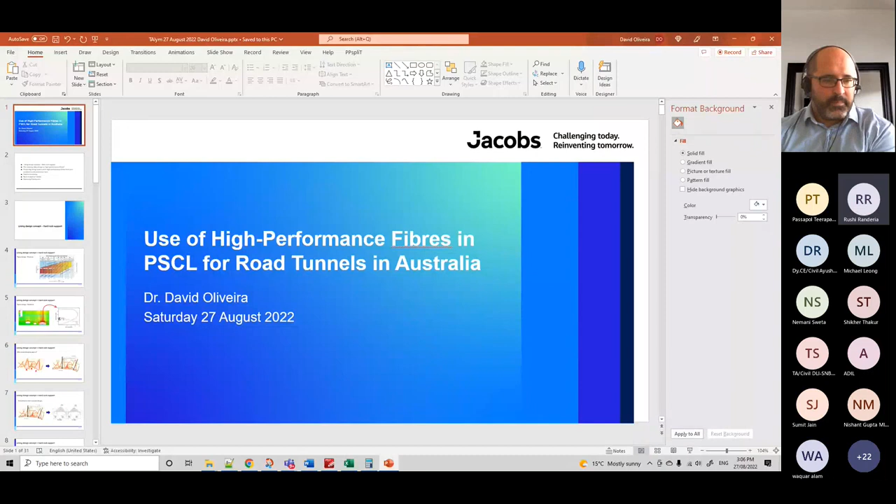And I've said this before, I'll just repeat to those who joined recently: I appreciate you taking your Saturday morning in India to join this presentation. Those who are outside India, I also appreciate your time. I can see a couple of friends here from Australia, so taking their Saturday afternoon as well. Thank you for the invitation, thank you for your time here and for listening to a little bit of what I have to say and my experience. So I'll just start sharing my screen here. I'll just make sure - can everybody see the presentation? Yes? Confirm to me, Rishi?

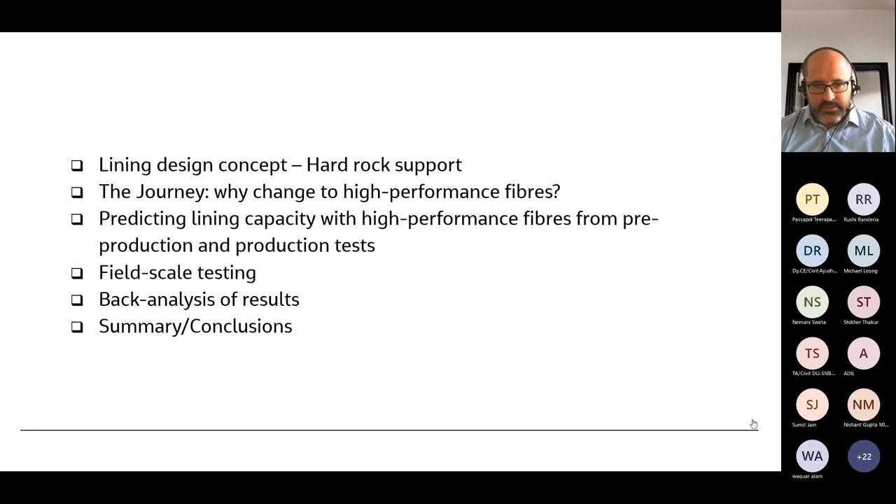So, looking first at the lining design concept, so everybody has a broad idea of what we're talking about here - we'll assume that the majority of people here have some tunneling background or some understanding. So I'll assume some of the most basic comments you already have an idea about. But if you don't, please just hold your question, put your question, and we'll try to answer it at the end.

When you talk about the design of shotcrete lining in rock, it's still today one of the most common practices—maybe more in mining than in civil, but even in civil—to first look at empirical design. It's a great tool, very practical, and a great starting point.

Here's a graph that most engineers involved in tunneling will be familiar with: the Q system support chart. What it tells us is that if you have good mapping and can identify the quality of your rock by the Q index, depending on your span, you can find in this chart the practical support applicable for that tunnel, that span, and that rock quality.

Just as an example, let's assume we have a rock with a Q value of 0.4, and we're looking at a tunnel where, when applying the ESR—similar to a factor of safety—we have a span close to 20 meters, quite large, but fairly common for road tunnels here in Australia. If you look at 0.4 and 20, the bottom chart indicates we'd need a shotcrete lining closer to 150 millimeters, or 15 centimeters, with a rock bolt spacing of 1.5. So that's an initial guidance.

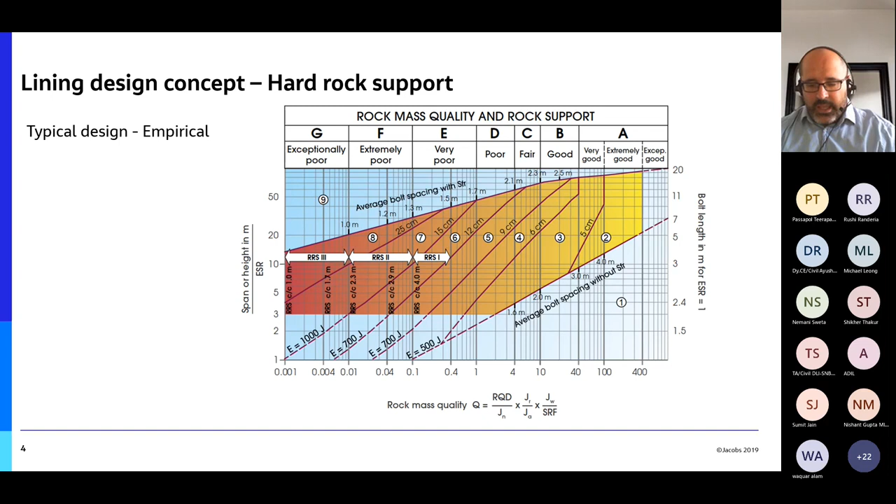So the second most common approach is numerical modeling. With numerical modeling you can bring in code aspects and do a numerical analysis. For example, this is an analysis with three tunnels, and actually beside a cavern here, quite a large cavern.

When you analyze these, you can extract information from your model on how the shotcrete has been loaded—extracting points for all the axial forces and bending moments, and plotting them in a chart where you apply your local standards, reduction factors, and load factors, to see if your loads are within the capacity of your shotcrete or sprayed concrete.

For example, here we see there are minor points exceeding the plain shotcrete curve, but all inside the capacity of a fiber reinforced shotcrete. So in principle this would satisfy code requirements, since you'd be applying the reduction and load factors defined in your code, and you can extrapolate other structural requirements from this.

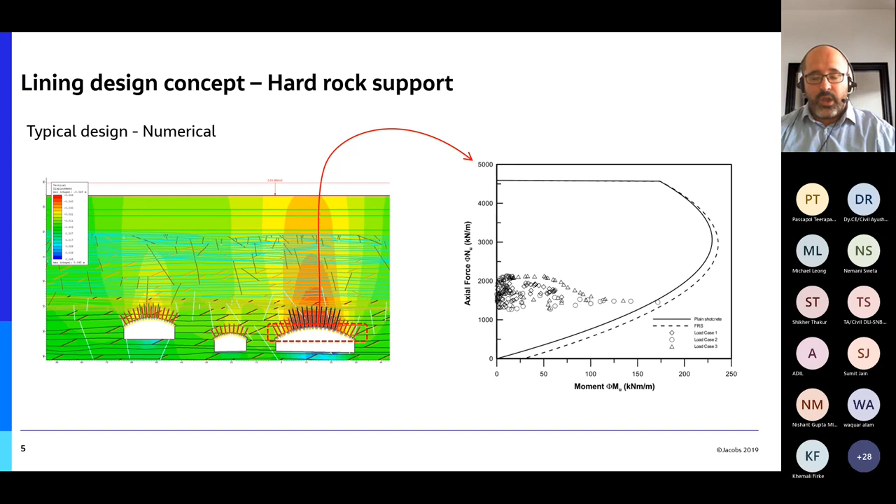I want to develop a simple model that represents how shotcrete performs in a hard rock tunnel, where it works in combination with rock bolts. Let's move on and look at what this means. When thinking about hard rock tunnel support, the first question we have to ask for any support development is: what are we designing against? What are the failure mechanisms we want to look at? There might be many, but here we'll look at the failure mechanism of the shotcrete alone.

When looking at a hard rock tunnel, we're worried about the global stability of the tunnel, and also the stability of individual rock blocks or wedges that develop around the opening. Here's an example: if we open a tunnel, showing a portion of the crown or roof, and if you do nothing, you'd have wedges falling out.

If one wedge falls out, it might bring further failures, because you'll start to unconfine other wedges that were not originally confined. For example, if wedges F and C fall out of your crown, you might start destabilizing wedges A and B, which will fall out, and then consequently E and D, and this could progress to a larger failure. So you want to make this stable.

How we do this in rock tunneling is, for this type of failure, we generally add rock bolts. We would add rock bolts tying wedge F back to better rock, and add a rock bolt through wedge C, which will hold it back.

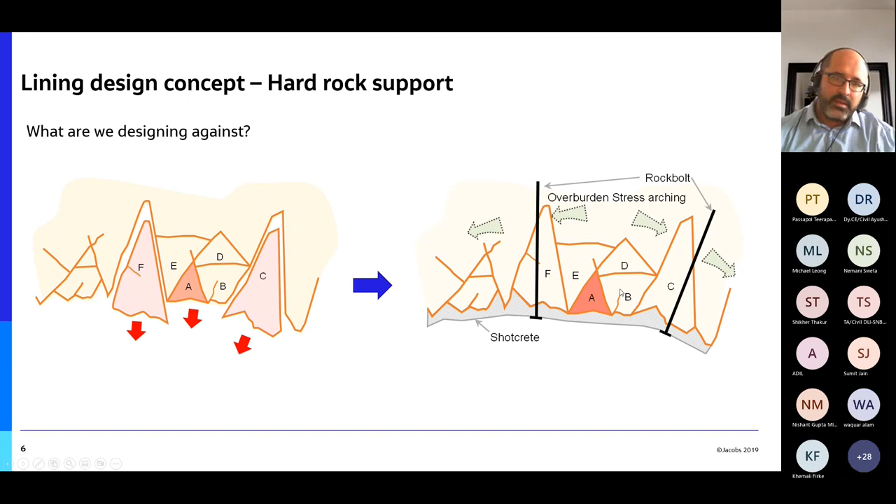So if we move along now, now I know what I have to design for, but how do we design against this? And we start to look at similarities, right? Similarities of how this system is working.

If we think that this system looks very similar to a slab on columns, essentially I have rock bolts that work as concrete columns, like in a building, and a shotcrete layer that works like a slab in a building. So it's just upside down in comparison.

For example, this is a picture from a structural code, just as an example of how we design slab on columns, where you design for the loads between the columns to be taken by the slab and transferred to the columns. The same thing here: the load will be taken by the shotcrete, spanned, and transferred to the rock bolts on the side. So it's a very similar design. We can use this principle of designing similar to a slab on column design, where the rock bolt is our column and the shotcrete is our slab.

When we look at how to design against this, we can use simplified methods. One of the simplest methods, actually present in many structural codes, is what we call the direct design method. The direct design method is very simple.

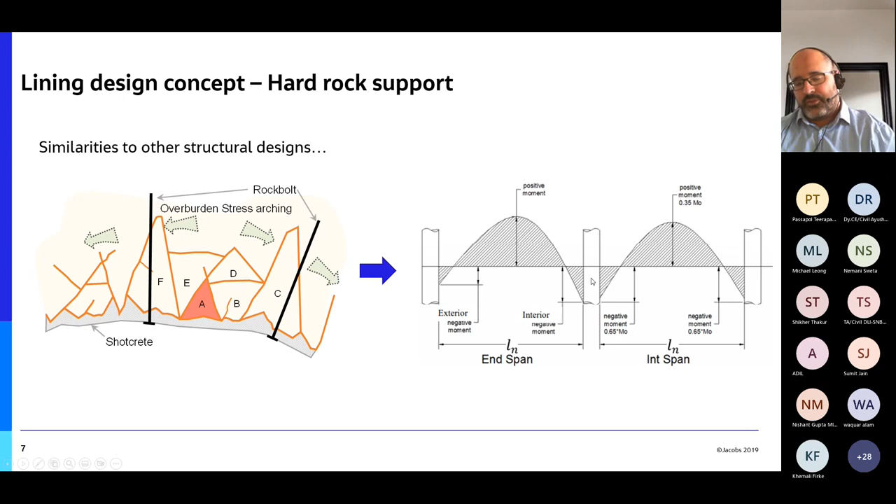This method was very simply addressed and presented in a paper that we use very often here for design, presented by Barret and McCreath. This paper was published in 1995. I forgot to put the reference here, but I'm more than happy if anyone wants to contact me later to know what the reference is — I'm happy to provide it. It's a very simple paper, and it focuses on this simple design method, the direct design method.

Then it highlights, when looking at the direct design method, that for shotcrete in particular there are four failure mechanisms we need to address and satisfy. The first failure mechanism is adhesion. When we spray shotcrete or sprayed concrete, obviously we want it to adhere to the rock, to bond to the rock. We typically want that bond to be strong enough not to fail. So the first failure mechanism is adhesion.

If the shotcrete is well adhered, well bonded to the rock, the next possible failure mechanism is direct shear. So if you have a load, it can actually shear off completely — a complete shear failure, shearing off the lining, just like in this picture. This direct shear is only possible if you have a good bond, if your bond does not fail. If your bond fails, then direct shear is no longer possible, because the shotcrete will be working in a different way. It's no longer bonded, so it cannot shear.

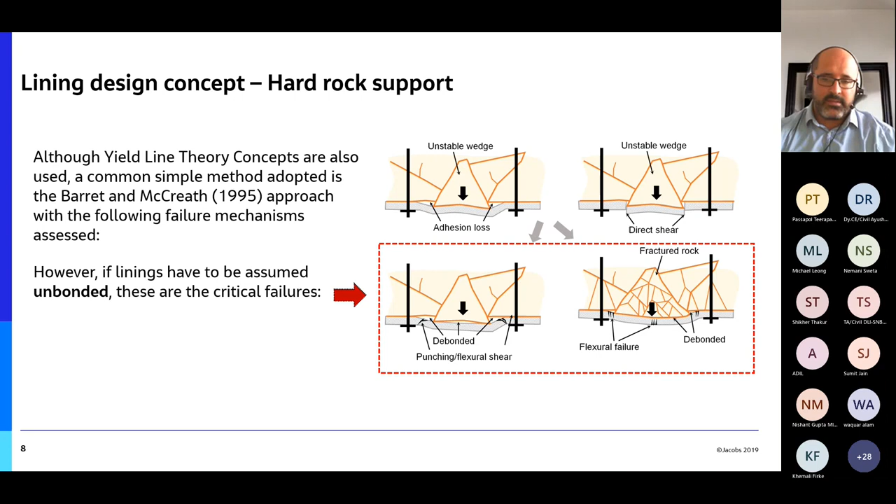So when you're talking about unbonded lining design, which means you assume that over time you're going to lose the adhesion, those are the two failure mechanisms we need to design for. Because we work with flexural capacity and shear, we need to develop shotcrete mixes and concrete mixes that have good flexural resistance, which is what we're going to move to understand now. So how we understand flexural capacity in shotcrete design is what we will have a look at very shortly.

There's only one thing I want to highlight here, just a preamble, a hint to the development and research we did here in Australia on how to better design our shotcrete linings. This simple design method assumes the lining or shotcrete as a slab or beam calculated as simply supported, and then there's just a translation of the bending moments to account for the continuity. So it's essentially relying on a pure bending capacity, just like we do with beams.

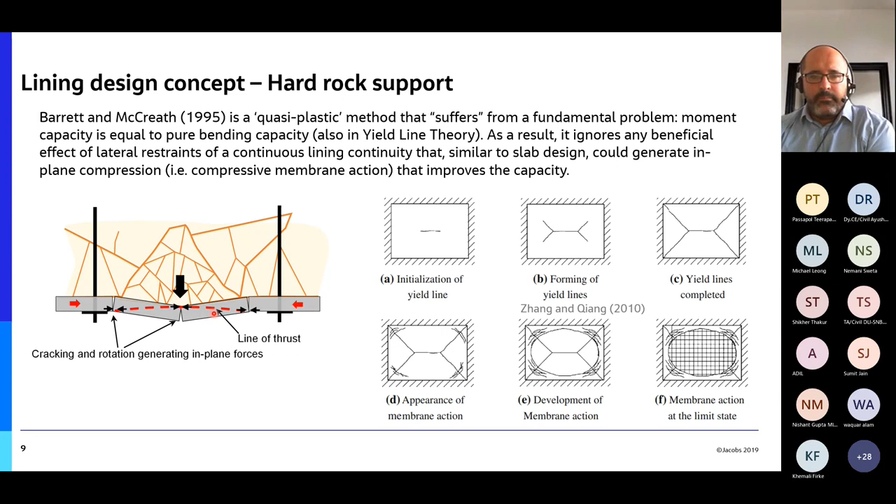As I was mentioning before, if we are relying on the shotcrete here as having structural capacity in bending, we need to satisfy that it can take that deformation. When we think about how the shotcrete is working here with this load coming from wedge A applied to the slab, a lot of engineers defend, and I actually fully agree, that the most representative testing we can do to represent this condition is toughness testing.

So there are different methods. There's the ASTM one, which is a round determinate panel, and there's also a square one, the most common being the EFNARC one. Why is this most representative? Because you can see where the load is applied here simply represents the reaction forces of the bolt.

And everything else is deforming around it and it's pushing. So you imagine that the wedge is somewhere outside here and it's pushing the shotcrete up, and your rock bolt's resisting. So this deformation represents your rock bolt, more or less representing the failure mechanism that happens with the shotcrete around the rock bolt.

Which is very reasonable to make this comparison. There's only one problem with this test, although it represents really well: it's typically done with thicknesses of similar order of magnitude to the linings that we use. For example, this panel is tested with a 75 millimeter panel, and shotcrete for rocks typically will be in that order, 80. The Norwegians established a minimum thickness of 80 millimeters, so you'll be working with 80, 100, maximum 150.

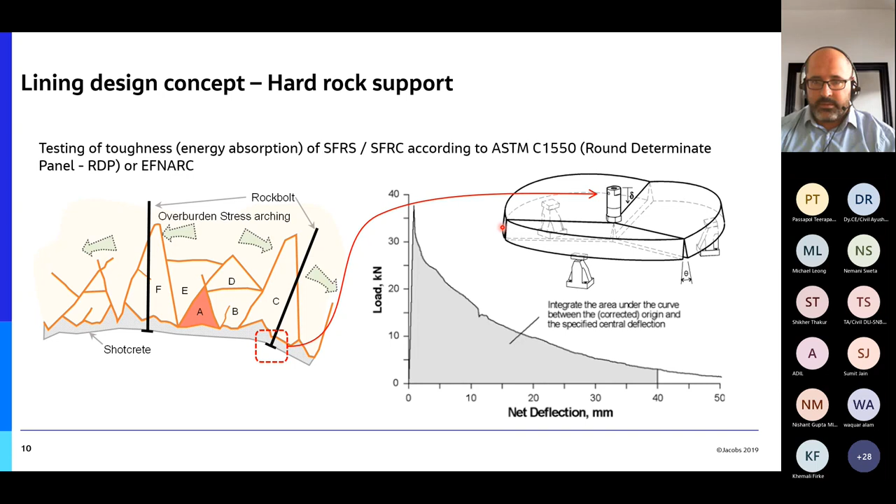There's a few studies, one of them by Stefan Bernard here in Australia, but there's also studies by Ada on how to convert the values from the round determinate panel. The reason why it has to be the round determinate panel in this particular case is because the test is determinate. The EFNARC is indeterminate, so there's no way of analyzing the failure in a determinate way. So it has to be round determinate panels to use this procedure.

There's methods to convert the test results from the round panels to an equivalent flexural resistance, which is the next topic we're going to be discussing. This is based on conservation of energy again, and using yield line theory.

So these are some equations. I'm not going to go into details here, but there are ways of calculating this. Because based on conservation of energy and yield line theory, we establish the way that the panel fails, and we know that round panels always fail this way, with 3 cracks. We can actually calculate an equivalent flexural resistance for a specific crack width that we have to design for.

And this is how we can actually connect the results of a round panel to the results of another testing, which is the next one we're going to show, the beam testing. If we calculate here, he's just demonstrating that calculating the results from this round panel had a very good match with the results of the beam testing, which is a test that directly gives you the flexural strength.

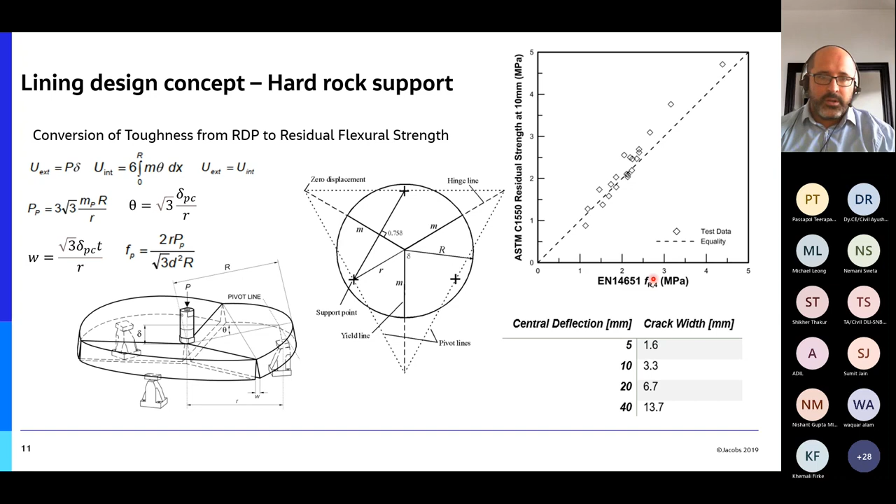As I mentioned, the test that gives you the direct value of flexural resistance is the beam test. It's simple to estimate and define the flexural strength of this beam, because it's also determinate. It's a simple beam, generally following EN 14651, which is a 3-point bending test.

What we get is a curve of load versus crack mouth opening displacement, showing how much the crack opens at this location. This gives straightaway the residual flexural strength, which is described in most, if not all, structural codes, such as RILEM and the fib Model Code 2010. You can apply these values directly, so you'll be in compliance with those codes when using this test.

This test gives you five thresholds. The first one is what we call the limit of proportionality. It says when you load the sample and exceed the elastic capacity of the concrete and it cracks -- essentially the first crack opening.

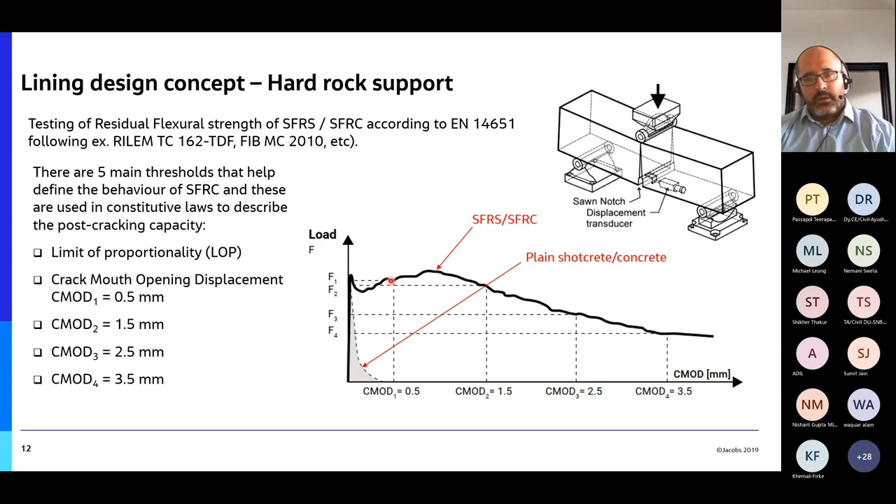Now that we've had a brief introduction to the concepts, let's understand the challenges we face and what we've learned. The first thing is to try to understand what values we want to achieve with our shotcrete.

We can compare, although not directly related, the results of toughness or energy absorption testing with beams. Some guidance, especially for rock support or tunnel support, leans toward toughness, because there's a lot of experience in the mining space where it's typical to specify shotcrete in terms of toughness rather than residual flexural strength.

Generally, in a tunnel where you expect low deformation, you don't need great energy absorption. Typically, mines here in Australia work with 280 joules, a measure of energy, at 40 millimeters deflection using the round determinant panel. In moderate ground, with moderate deformations, you're about 360. When you get higher deformation, typically it's 450 or higher.

This is for areas of high deformation, sort of squeezing ground or higher stresses. In fair to good quality rock in shallow conditions, generally you don't need to go that high -- typically working toward 280 or maybe 360 maximum.

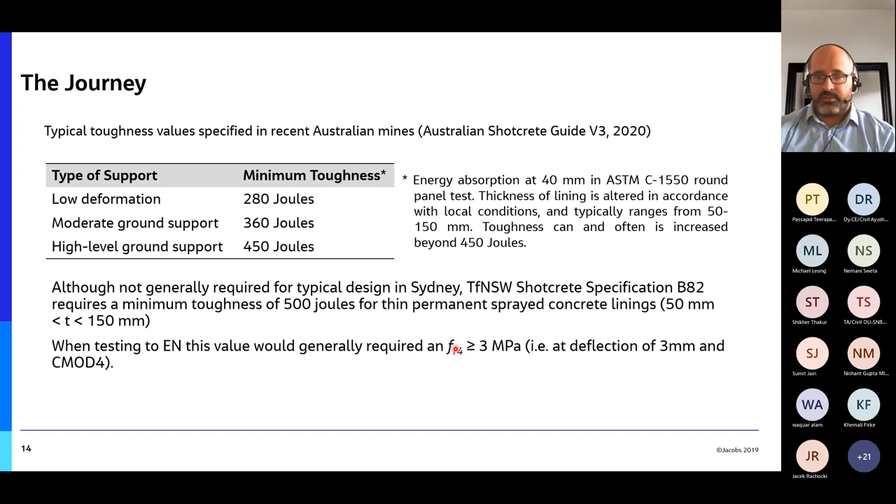So we used a very good fiber. By no means is it a poor fiber, which was an end hook fiber, which had a relatively high strength of 1,345 MPa. This end hook fiber here, and we used a dosage that was very reasonable.

Say we started with 35, but we went from 35, 40, even 45. And what we're going to be seeing here is that even with this dosage of 40 here, for example, and we even tested 45 too, we could, as an average, achieve the 3 MPa flexural strength for fr4, which is that CMOD4 here, as an average, right?

But as most structural engineers will know, we can't be designing for average values, right? We want to achieve characteristic values where we have 95% of our results exceeding the value that we specify. And there was a lot of work. As I said, we went all the way up to 40 here, and we wouldn't, with this fiber here, we wouldn't achieve it. Right, and there was a series of 2 projects that use this fiber in a row, and we couldn't just achieve it.

That meant that we couldn't take the benefit of reducing thickness, for example, because we could no longer rely on a residual flexural strength of 3 MPa that we wanted. So we had to demonstrate that our shotcrete could work with strength that was, in terms of characteristic values, even as low as 2 MPa. So it's a big drop from 3 to 2 MPa. So we had to satisfy with 40 kilos that we had to design for 2 MPa.

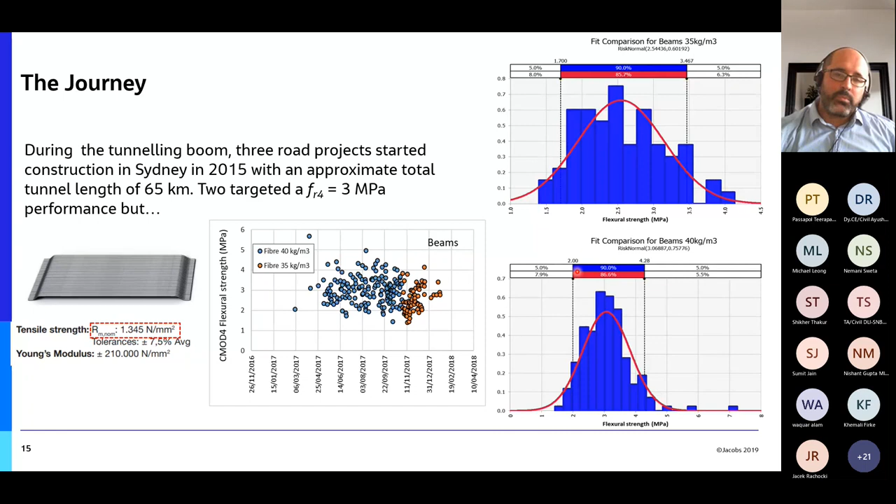So what we did in the next project, so obviously just highlighting here what happens is, besides a number of non-conformances that we had to address in the follow-on project, there was also this change in requirements that we could no longer rely on adhesion. So the previous reliance on adhesion also helped us, because it means that if we could rely on adhesion, flexural failure is not a viable, is not a possible mechanism. So this changed in the process of these initial projects.

And there was also another requirement that, again, this is not even discussed, for example, in the empirical design by Barton, is that we also had to design our thin shotcrete lining for huge fire exposures of 4 hours ISO curve, for those who are familiar with fire design, or even 2 hours hydrocarbon curve.

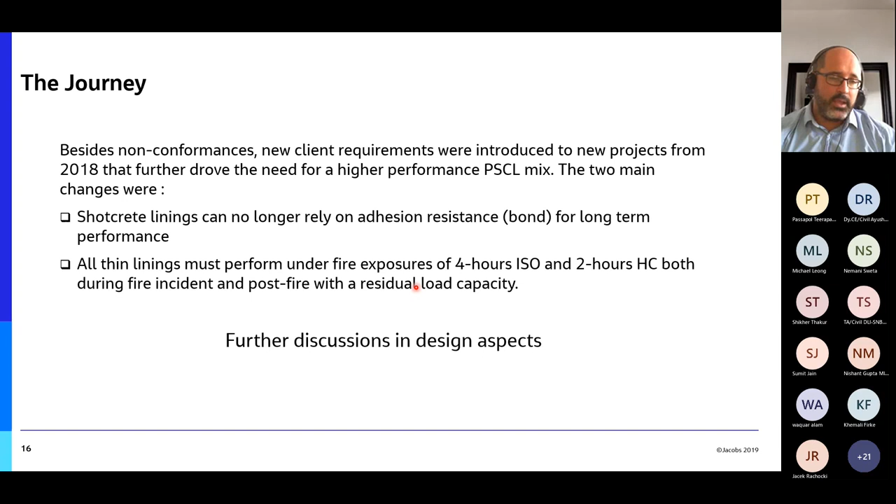So when you add this requirement that we can no longer rely on adhesion, and this requirement to design for fire, it was putting a lot of pressure on our shotcrete design, and we had to make our shotcrete work better in terms of flexural resistance. We really had to satisfy that 3 MPa that in these first couple of projects we couldn't satisfy, even with a reasonably good fiber.

So that's when we started looking at a high performance fiber. And why a high performance fiber? You can see that the change in the end hook shape has changed. So you have another fold in the end hook here. This provides a better embedment, a better pull-out strength of the individual fibers.

And the tensile strength of the fibers also increased significantly. From 1,300 and something that we had before, we went all the way up to 1,850 MPa. So a significant increase in strength in the steel for these fibers, and a significant improvement in the pull-out performance of these fibers.

By having a better embedment, right? So I've avoided using the commercial term, obviously, but for example, this fiber here is what is called the 4D fiber by Dramix. So it's a high performance fiber, and it was never used in shotcrete before. Common in TBM design and segmental lining, but was never used, certainly not in Australia. We tried to find where else in the world it has been used, but certainly in Australia it had never been used before in shotcrete.

And we decided, well, let's give it a go. Let's adopt this, and it's more expensive. But what it resulted in is that with this better fiber, we could reduce the dosage of the fiber. So we tried even 45, if you remember what I mentioned. We managed to drop it back to 35, and the saving in the amount of fibers here was paying for the cost difference.

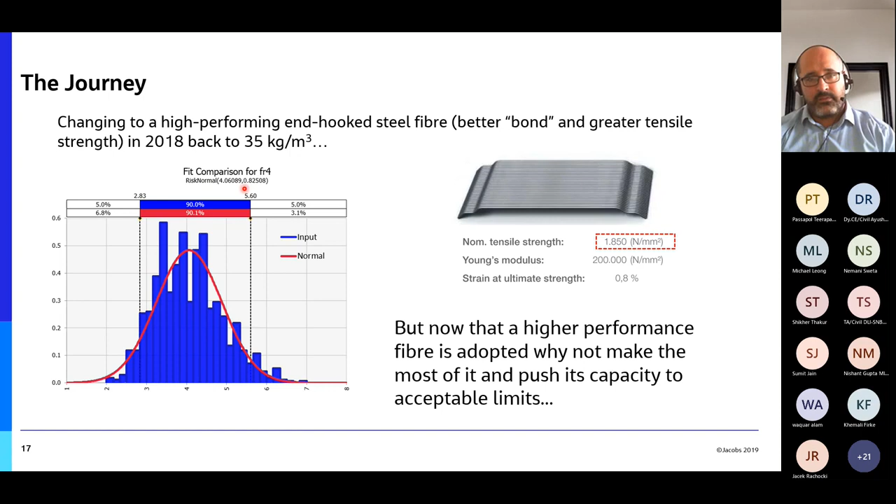So we moved to this high performance fiber, and the next project, we used this for about 250,000 cubic meters of shotcrete, where this shotcrete was consistently achieving values greater than 3 MPa, and was achieving 2.83 MPa as a characteristic value, which means 95% of results were above this.

So now that we managed to achieve the target that we wanted, close to the 3 MPa that I mentioned before, we wanted to investigate: okay, now I can already make the lining thinner, but how can I make it even thinner? Or not even thinner, but how can I make it work with this extra requirement for fire and for not relying on adhesion? And we started investigating the aspect I mentioned before of the compression membrane action, how the lining, when deforming, will generate internal in-plane compression that will bring the bending, the flexural capacity, up.

So to start with, before doing testing, we obviously started looking at some aspects of the design and doing some numerical assessments and numerical modeling. The first aspect that we wanted to investigate, which is very particular to Australia, to Sydney, is the interaction between our shotcrete and our rock bolt support.

If you look at the very first few pictures that I showed before, I always show the rock bolt plates on top of the shotcrete, because this is the most common application. You apply a certain layer of shotcrete first, then you bolt, then you shotcrete it again. In Sydney, in Australia, we have a different practice for questions of productivity, where we always bolt first. So when we always bolt first, we no longer have the support of this plate, and we need something else to create that support.

So what we do is use rock bolt face plates that have what we call handlebars, structural steel that goes out like this, with the intention of hooking up the shotcrete when it goes in here. The failure mechanism was originally estimated to be something like this. If you hook the shotcrete up here, you can see that for the same thickness, we already lose some of that punching capacity, because it's no longer coming all the way from the back, it's coming from inside the shotcrete.

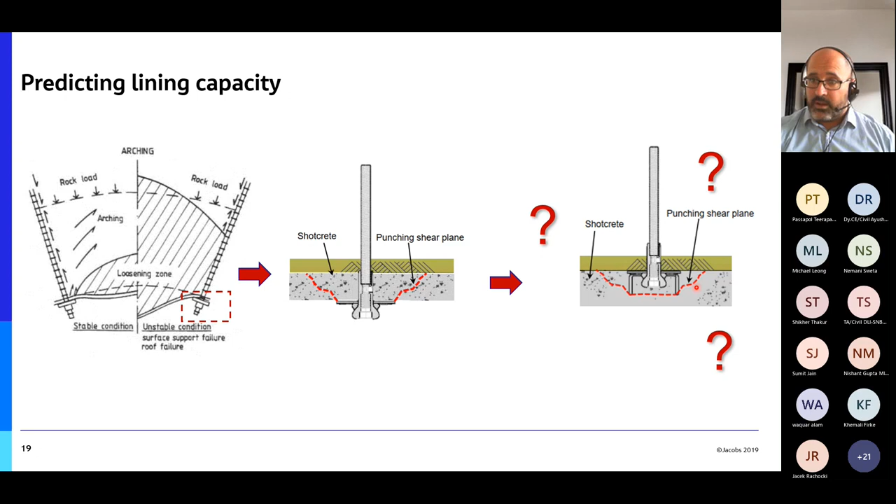So we wanted to test the capacity of our shotcrete lining, and had to understand the capacity of this system first. We did field tests where we simulate the pull-out of the rock bolts, similar to the inverse of those round panel testing. We sprayed big concrete blocks, like you see here, with the formwork and the rock bolt inside representing the rock bolt in the tunnel, and we shotcrete this in place. So this is shotcreted, not just a concrete pour.

What we do is turn it upside down, put a hydraulic jack, and load it up to try to pull it out. So there's a pull-out capacity of this shotcrete here, and we develop curves to understand the capacity. I call this the Excalibur test - like someone trying to remove the Excalibur sword from King Arthur from the rock.

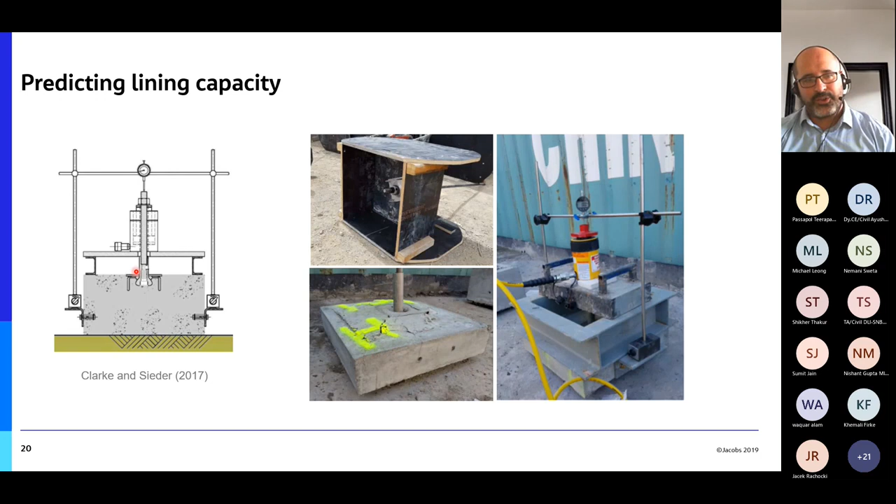We generated a number of tests here. This is just some of the results, only about five, but we had more with different types of plates and configurations. We identified that the maximum load one individual plate like this could take would be in the order of about 80 kilonewtons. We also back-analyzed these with numerical modeling to understand the failure mechanism.

One interesting thing we noticed - we tested rock bolt plates that had this handlebar, you can see the handlebar a bit better in this picture, and we also tested rock bolt plates without the handlebar to see what was the benefit. What we noticed, and confirmed with numerical analysis, is that the majority of the capacity for the rock bolt type we're using wasn't coming from the handlebar, but from the shotcrete encapsulation around this hemispherical dome of the head here.

Both the rock bolt plates with and without the handlebar achieve the same peak capacity, but the main difference is that once the shotcrete failed, the plate with the handlebar had ductility to keep continuing loading without a significant drop, while the one without the handlebar would achieve peak capacity and immediately drop. So we confirmed the capacity is actually coming from the head pullout, but the importance of the handlebar in this case was to provide ductility.

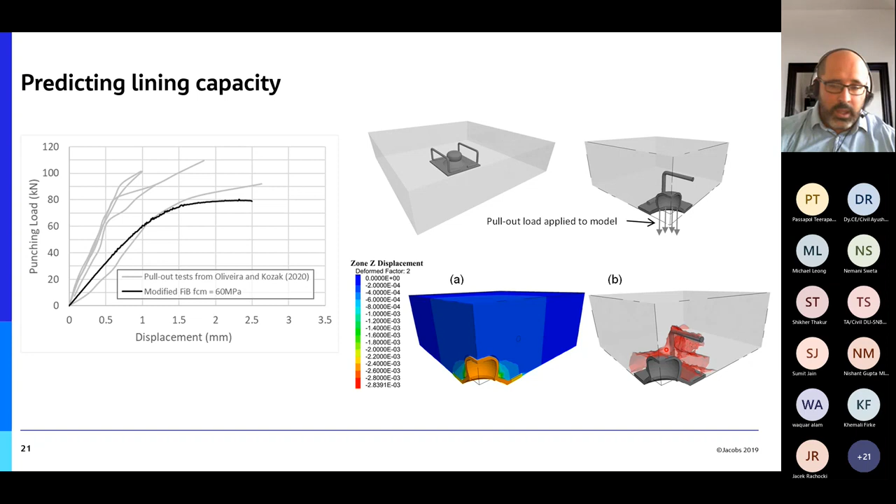So what we did later is, as I said, to try to predict the capacity of our concrete lining, we did some numerical modeling. Imagine our roof is bolted like this, with a pattern of bolting, and we investigate one bolt in the middle, very similar to the round panel testing. Since it's a regular pattern, we can take advantage of planes of symmetry and simulate a single panel numerically.

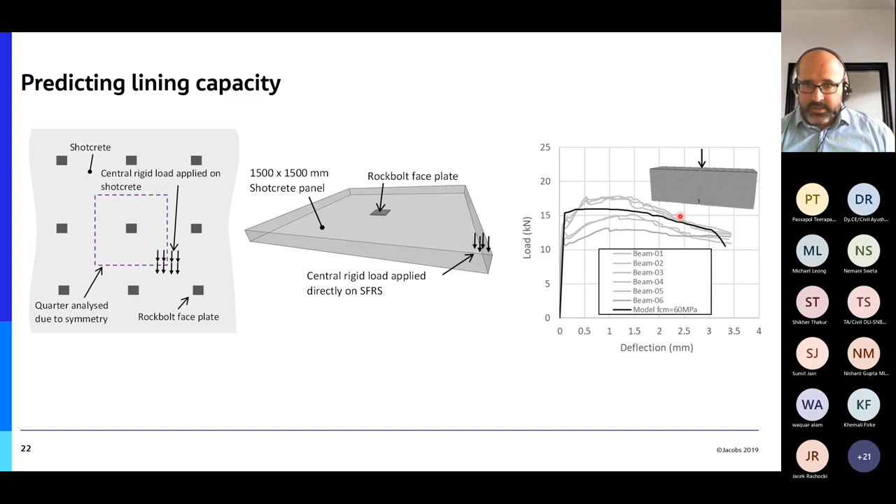Imagine the wedge, the wedge A that I showed in some of the pictures, is located here and deforming. So we load a numerical model with this and see the resistance of the rock bolt plate. To do this numerical model, we calibrated the performance of our shotcrete against beam testing, as shown here. We estimated the capacity of our lining, taking advantage of compression membrane action, would be about 280 kilonewtons of the shotcrete if there's no punching failure, while the simple design method, the Barrett-McCreath method, was only predicting about 60 or 70.

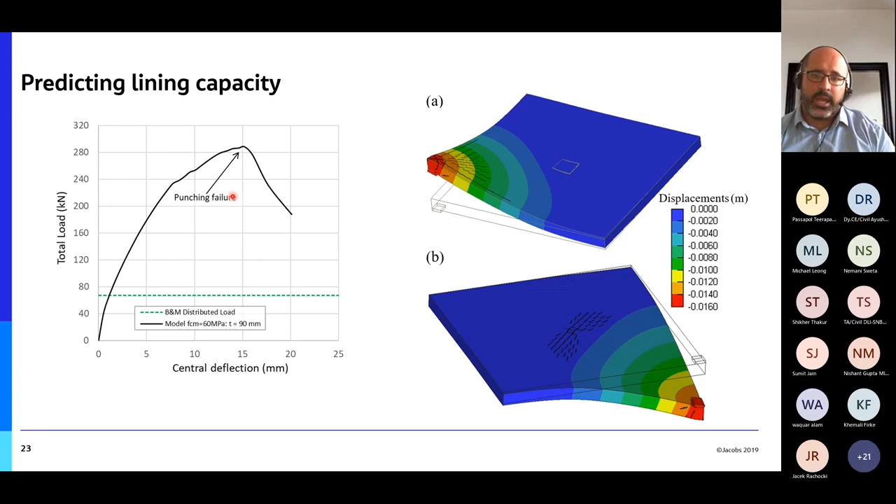So when taking compressive membrane action, we were observing an increase of about 5 to 6 times the capacity, and we wanted to take advantage of this. So numerically and based on simple testing, we proved that we had a high capacity because of membrane action. So our next step was to do field scale testing to prove that in the field we can also achieve this when we combine with the high performance fibers.

So what we did, we created a test in the field where we would shotcrete a wall, and we would put a loading system behind the shotcrete. So we created a slot in the rock. It's just hydraulic pressure bags, those bags that sometimes are used to lift heavy equipment, or even to lift debris, for example in accidents, or even to open cars that have crashed, if you have seen those types of hydraulic pressure bags.

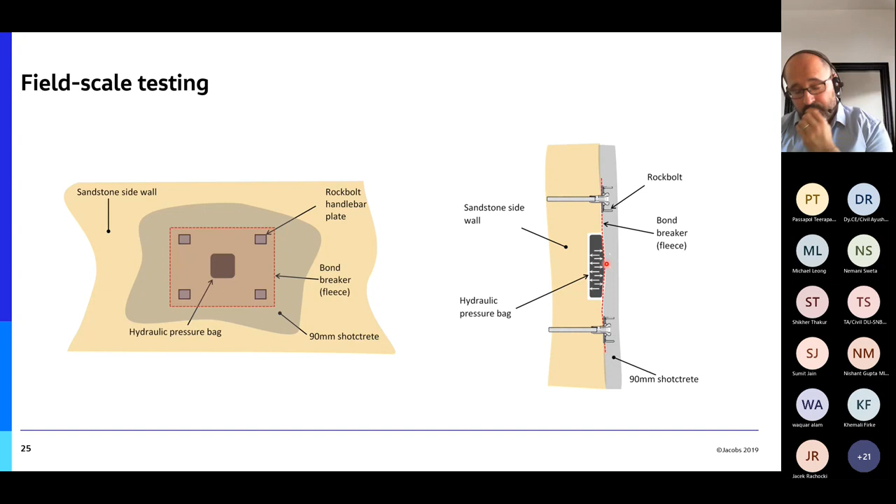So we put it behind the shotcrete here. We force the shotcrete to be debonded from the rock here. So we put a fleece that makes it debonded, so it has to fail in flexure or punching. And then we load it.

We had a few panels for this testing. We loaded and we checked crack pattern, and we had a load system here which could measure the deflection of the shotcrete here, so we could actually create a load deflection curve of this field scale test.

And why was it about 320 kilonewtons? Because this is the capacity of 4 rock bolt plates, right? Remember that our rock bolt plate pull out had only 80. So if you do 80 times 4, that's why we were only achieving the 320. So we proved that our shotcrete was not the weakest point, right? So we could make it as thin as possible because the weakest point was the rock bolt plates.

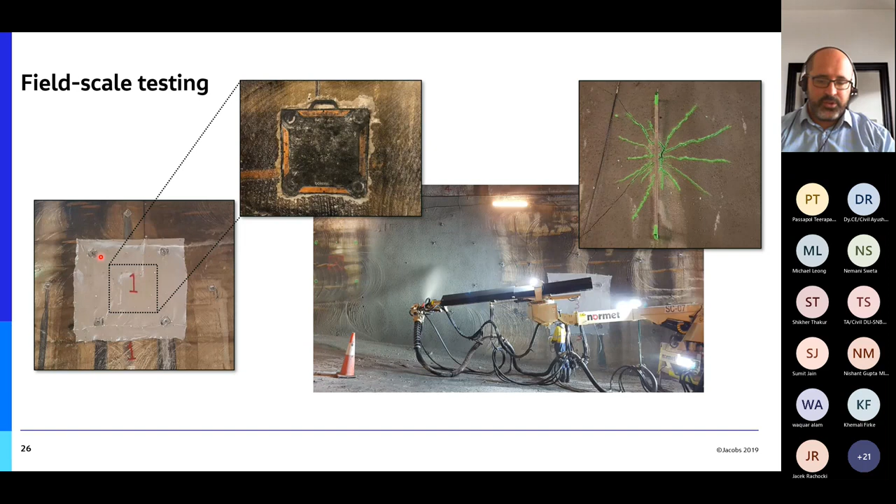While 1 rock bolt plate, when it fails, has nothing else to resist. While in reality, if you look here, if these rock bolt plates fail, I have other rock bolts around the tunnel to resist, which means that the span increases, right? But you still have resistance on the other rock bolts, which in the case of our numerical model, it doesn't. And that's why you see this big drop, while the others show a ductile behavior.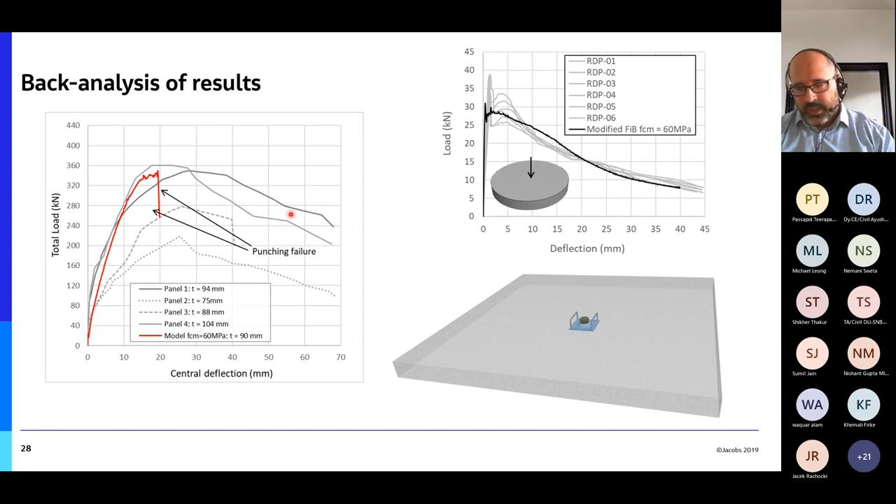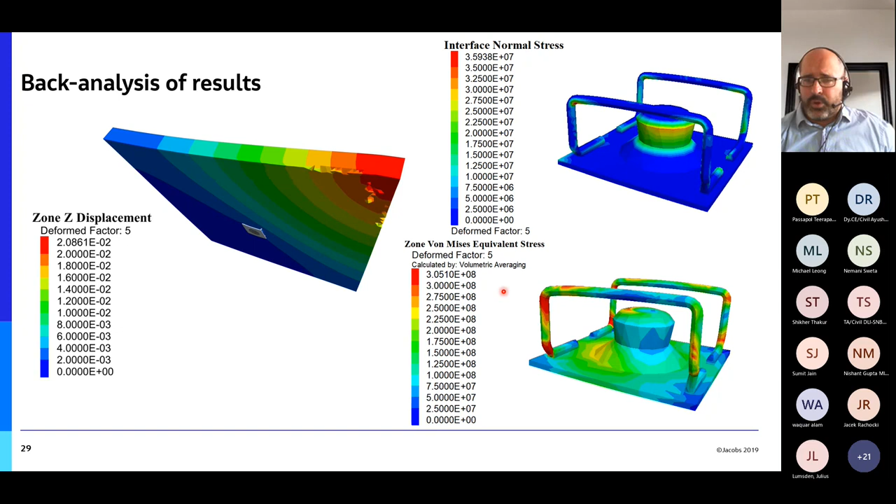And we confirmed that all the failure by numerical analysis was indeed happening through the rock bolt plates here. So we checked that the plates were yielding and stretching, and that's likely why we achieved that capacity.

So just to conclude, the use of high performance end hook fibers was very effective in achieving high performance ground support here in Sydney. It became now the go-to mix design using these high performance fibers. We are using round panel tests, consistently exceeding 500 joules of capacity, and also consistently achieving the residual flexural strength of approximately 3 MPa for the dosage of fibers we adopted, which is only 35 kilos. Obviously, production testing has only minor outliers, which is at 5% we typically expect.

And this, combined with compressive membrane action, allows us to do permanent concrete linings that are relatively thin and even resisting fire design, at 90 millimeters. The project ended up not using 90 millimeters. They ended up using 110, not because of ground load requirements, but because of embedment requirements for other fixtures, for things that need to be hung from the shotcrete in the long term.

So these elements needed an embedment close to 90 millimeters, so they needed a little bit extra at the back to satisfy that embedment. The thickness ended up being increased for practical reasons, but from a structural point of view, 90 millimeters would be sufficient, assuming the lining is unbonded. This capacity was demonstrated by numerical modeling, lab scale testing, and field scale testing.